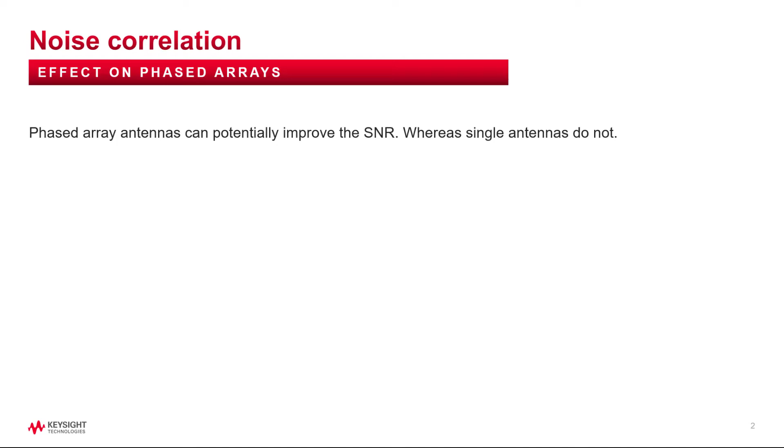In this video, I will examine the noise correlation and its impact on phased array performance. Phased array antennas can potentially improve the signal to noise ratio, whereas single antennas cannot. This is perhaps the topmost reason for adopting array antennas in almost every wireless communication system.

The SNR improvement is a result of the non-correlative property of the noise present at its input. Is noise always uncorrelated? Not necessarily. It could be both correlated and uncorrelated. By looking at the noise, we would not even know whether it is either of them or both of them. What happens if we have both correlated and uncorrelated noises present in the system? How does a phased array perform? Let us examine all of the above with SystemVue.

In this schematic, we have only correlated noise. We took a single oscillator and set its signal power to 0 watts, whereas the noise density was set to an arbitrary value, minus 154 dBm per hertz. Then we split that into 144 equal channels. We combined all 144 of them and monitored the spectrum at the output. We also monitored the spectrum at the input of the combiner, and we collected the samples into a numeric sink.

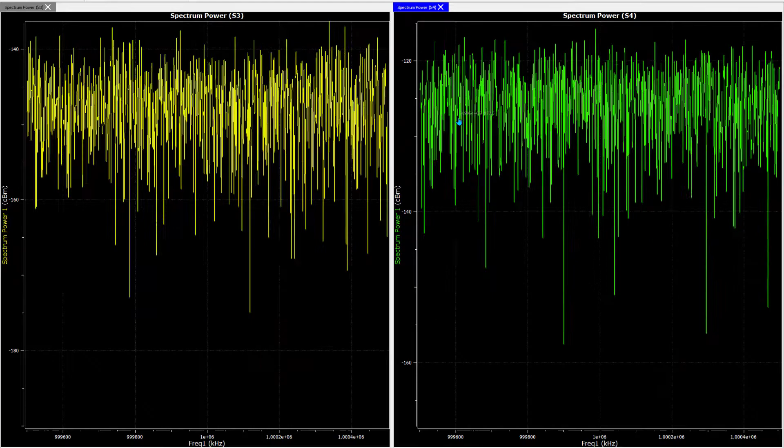If we look at the spectrum from the left-hand side, which is the input, to the right-hand side, which is the output, we can see that there is an amplification of the noise by about 20 dB. Very easily we can see that. This amplification of the noise indicates that the noise could be correlated.

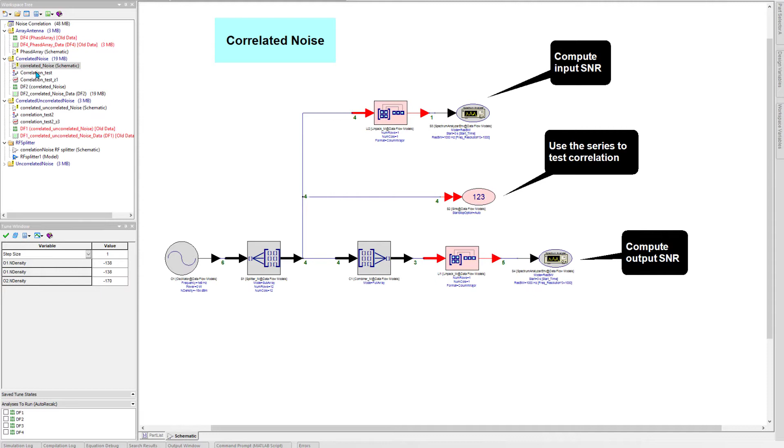We can perform a simple test by collecting the samples in two individual channels and then performing a cross correlation between them using a script shown here, and plotting it to notice that we got a distinct peak in the middle, indicative of the correlation property of the noise.

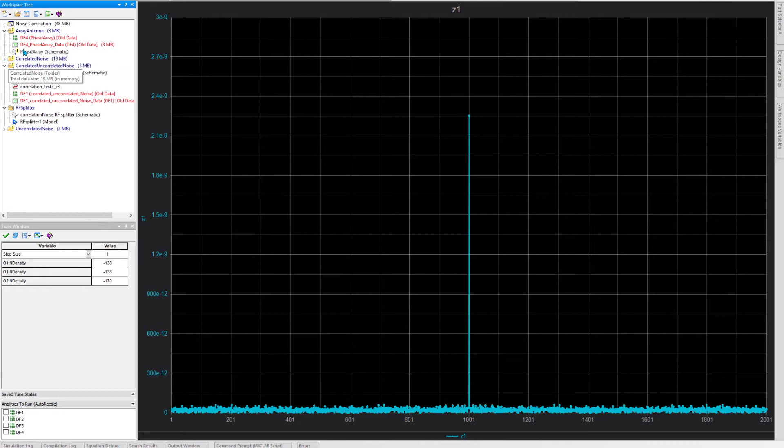Let us go and examine the case of uncorrelated noise present in the system. In here, instead of one oscillator, we took 144 individual oscillators. The thick arrow indicates a matrix. It's a matrix of 144 oscillators. Then we combined all of them and monitored the spectrum. We set the power of the oscillator to be 10 dBm and the noise density to be minus 150 dBm per hertz in each one of these oscillators.

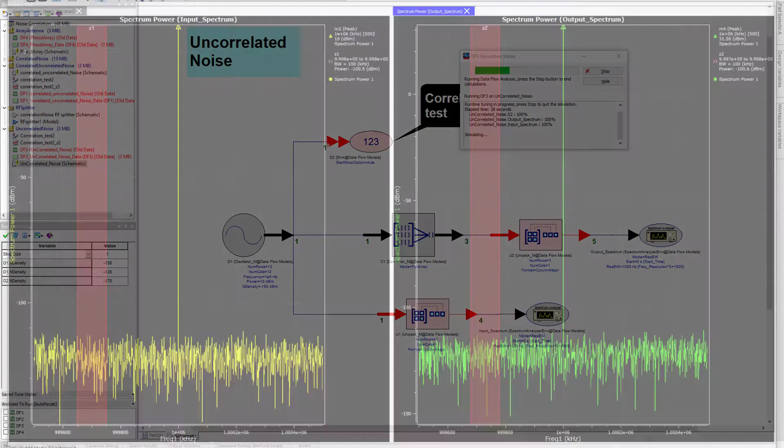Now, if we see the signal to noise ratio from input to the output, at the input we have a signal to noise ratio of 110 dB. At the output, we have a signal to noise ratio of 131.58 dB. So we have a clear improvement of 21.58 dB of signal to noise ratio. This improvement came about because all the noise was uncorrelated. The combiner could not add them up, whereas the combiner added the signals very effectively.

What happens if we have both correlated and uncorrelated noise present in the system? Then we have to consider the relative levels of the correlated versus uncorrelated noise. Let us set the correlated noise to be a very tiny value compared to the uncorrelated noise. If we look at the spectrum, we see again the same thing. We notice about 21.58 dB improvement in signal to noise ratio. So we got the full advantage of the power combiner.

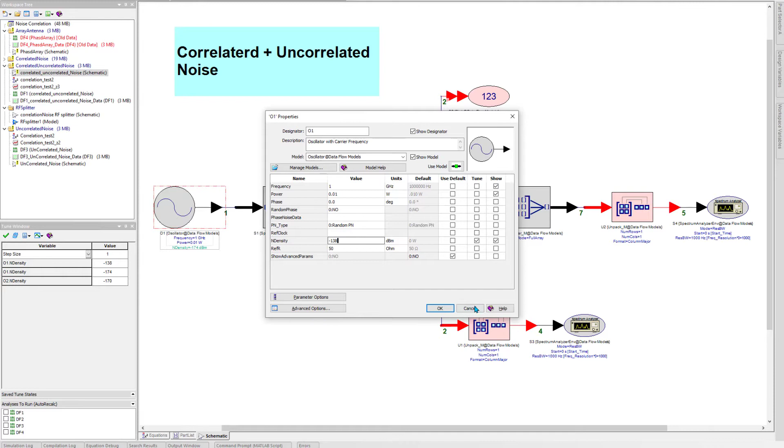If we change the relative levels of the noise contributions, we keep the correlated noise slightly below the uncorrelated noise so that we can still see some improvement in signal to noise ratio. We notice that the signal to noise ratio at the input is about 91, 92 dB, and at the output it's about 98, 99 dB. So a clear improvement of about 6 to 7 dB from input to the output. So we did not get the full advantage of the combiner, but we did get some improvement of signal to noise ratio. This is exactly what happens in a phased array.

Before we go on to the phased array, in most practical phased arrays we use RF power splitters, high frequency power splitters. These could typically be Wilkinson power dividers. So this power splitter takes the noise at the input and divides it equally to the output. While doing so, it incurs a loss of both insertion loss plus split loss of about 22.58 dB. The insertion loss could be even much more in a practical power splitter. So at the output, the noise will appear in each one of these individual channels reduced by 22.58 dB.

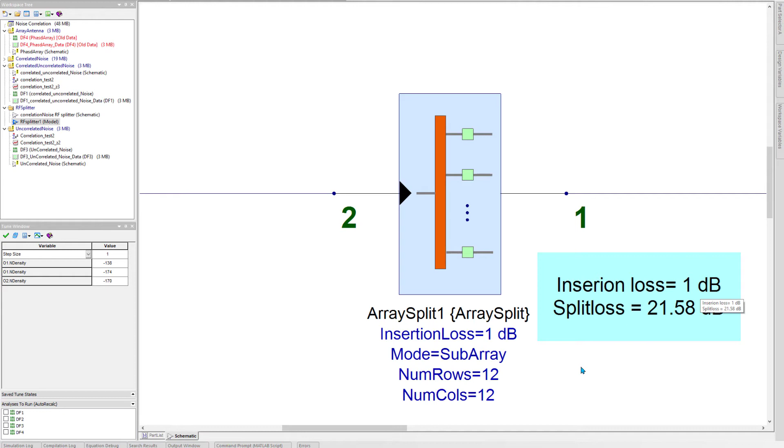Because this is a passive component with loss, it will appear as if it has a noise figure of 22.58 at the IEEE room temperature. This will produce a noise equivalent to KTB-NF. So it will add its own noise contribution at the output into each one of the individual channels. This noise produced by the power splitter is non-correlative. It's uncorrelated. So in a practical power splitter, at the output, we will always see both correlated and uncorrelated noise.

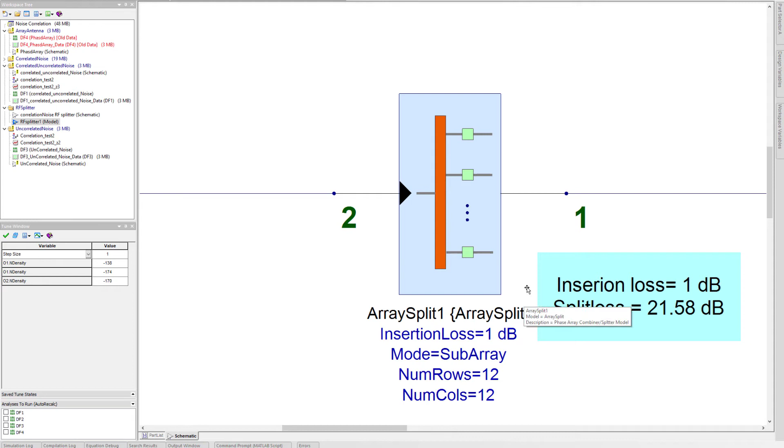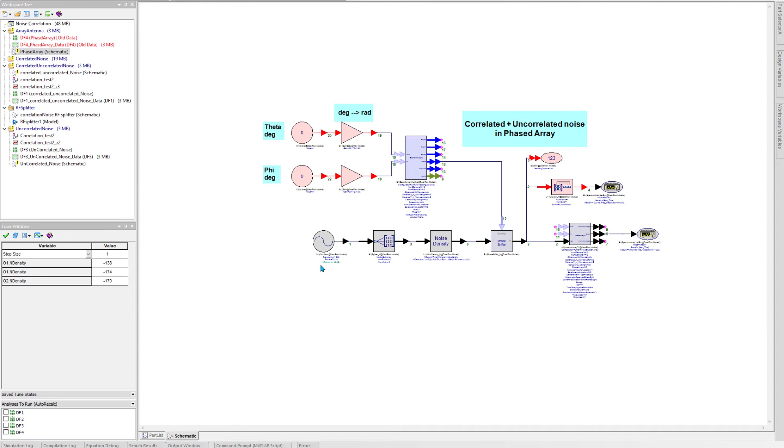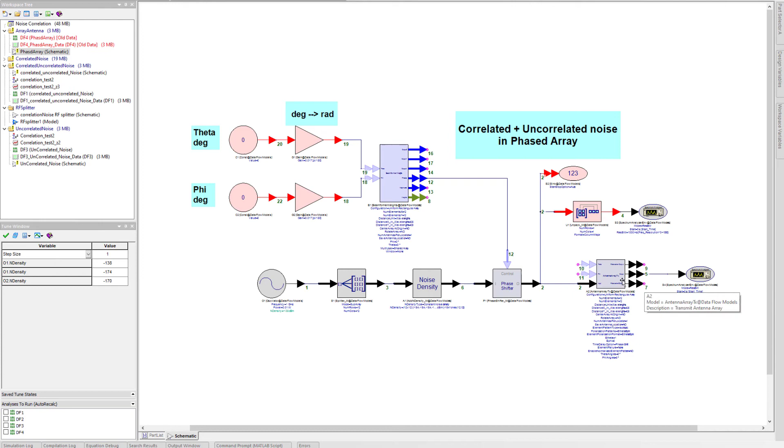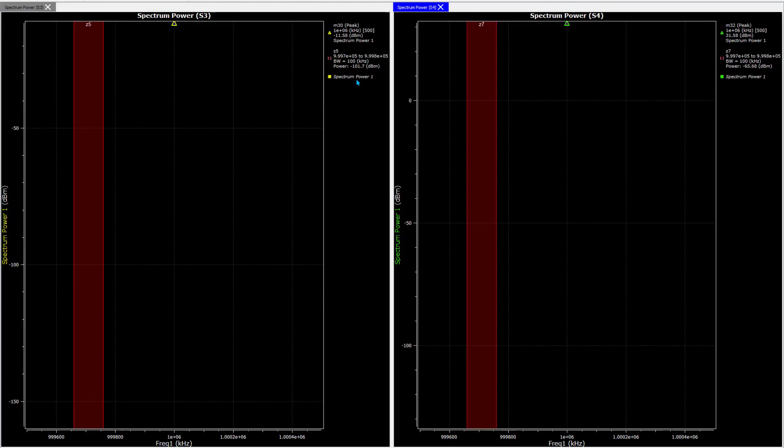Let us examine a phased array schematic where we have both correlated and uncorrelated noises present. The relative levels are set like before. We kept the correlated noise slightly below the uncorrelated noise. And we can steer the beam in any direction and monitor the spectrum in the far field radiated by this array antenna model. Now we see that again we get an improvement of signal to noise ratio from input to the output of only about 6 to 7 dB, because both correlated and uncorrelated noise are present in the signal.

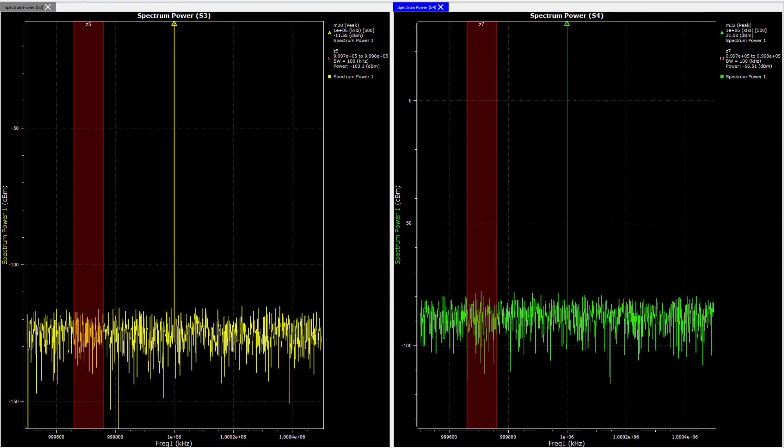So a phased array, similar to the power combiner, in fact we call that a beamformer in phased array systems, will give varying degrees of signal to noise ratio improvement based on the incoming noise with contributions from correlated and uncorrelated portions. It should also be noted that as you steer the beam using the phase shifter, the gain of the array will vary. The gain of the array consists of two parts, array factor and element factor. The improvement of signal to noise ratio is entirely due to the array factor. It does not depend on the element factor.

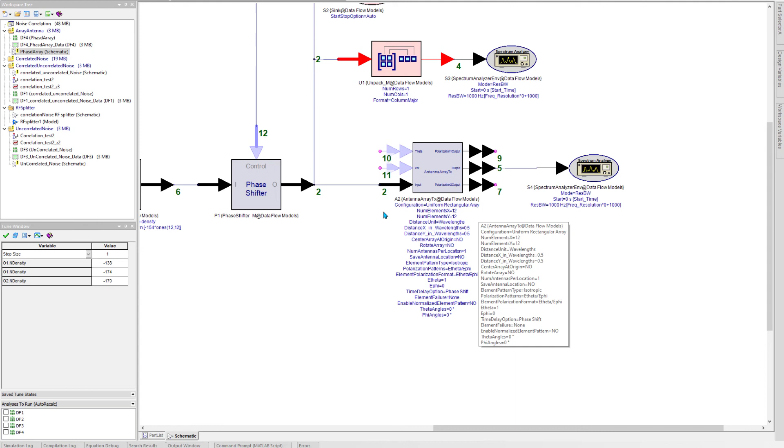This also becomes a very nice tool in our hand. If we want to improve the signal to noise ratio, we could potentially increase the size of the array and get a better signal quality at the output.